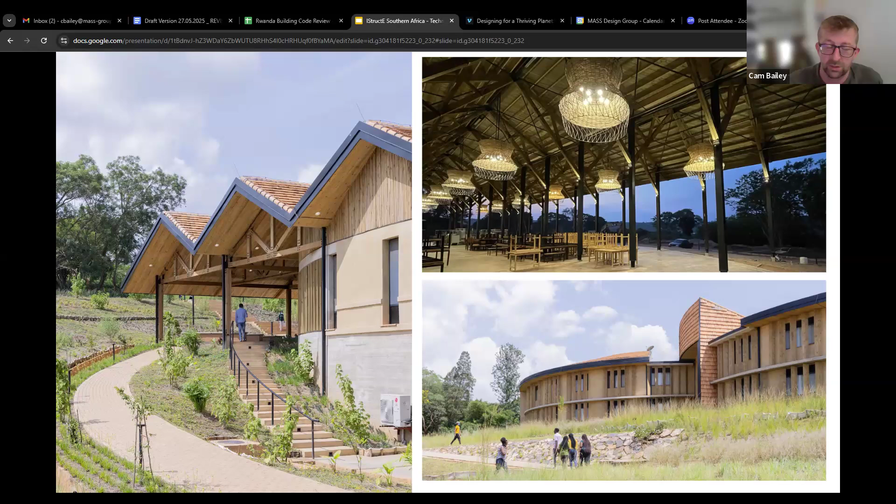Across all buildings, the foundations are constructed from local stone. The walls are constructed from earth sourced from the site, and the roofs are built using regionally sourced timber trusses for the most part, but also beams, rafters, purlins, etc. The project's won a number of awards since it was completed a few years ago, including an IStructE award in 2024 that was given for holistic regenerative design.

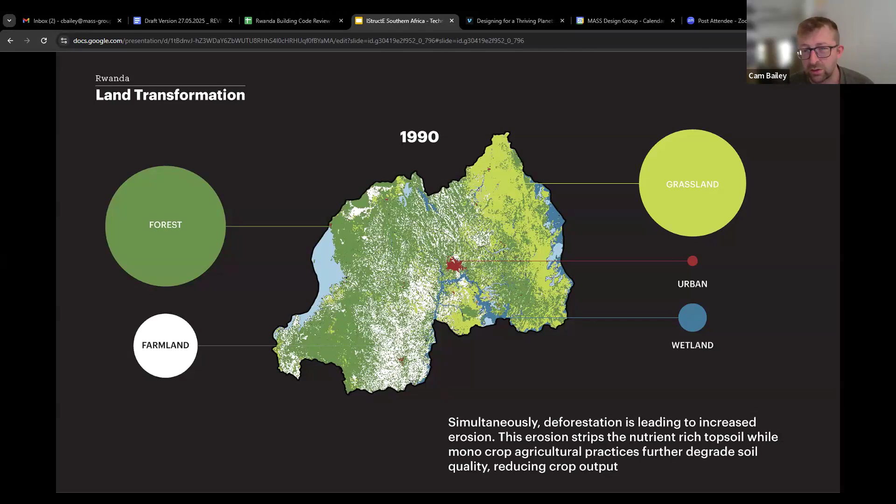So a bit of background on why this project. The majority of Rwandans still depend on subsistence agriculture across the country. And the country is the most densely populated country in Africa and one of the most dense rural landscapes in the world. In the 1990s, the country had a healthy proportion of natural forest and grassland. However, over just 3 decades, you can see how much of this has changed, with much of the forest and grasslands remaining being enclosed in national parks.

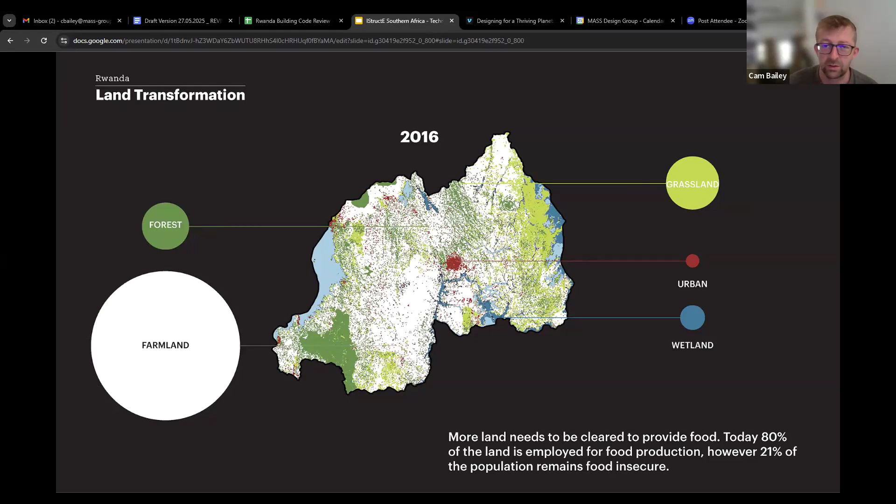Even with around 80% of the land now operating as farmland, around 20% of the population remain food insecure, and this is a growing issue as the population continues to increase. RICA's investment in innovation with sustainable agriculture is considered crucial to the country's health and wealth outcomes. So the mission of the RICA campus was to train the next generation of leaders in conservation agriculture to attain healthy and sustainable food independence in Rwanda. So here we asked, how do you best balance conservation practices, agriculture practices, community well-being, along with local material sourcing and carbon positivity at scale?

So we mobilized this through what we call a One Health approach. So our landscape team first observed the campus to identify key ecosystems that were important to preserve. A vast portion of the 1,500 hectares contains one of the last remnants of savanna forest in Rwanda, outside of the Akagera National Park. While the papyrus wetland along the lake shore at the bottom of the hill is a hotspot for biodiversity and also an important material source for local craftspeople. We protected these areas of the site and located all buildings on the campus in the space between.

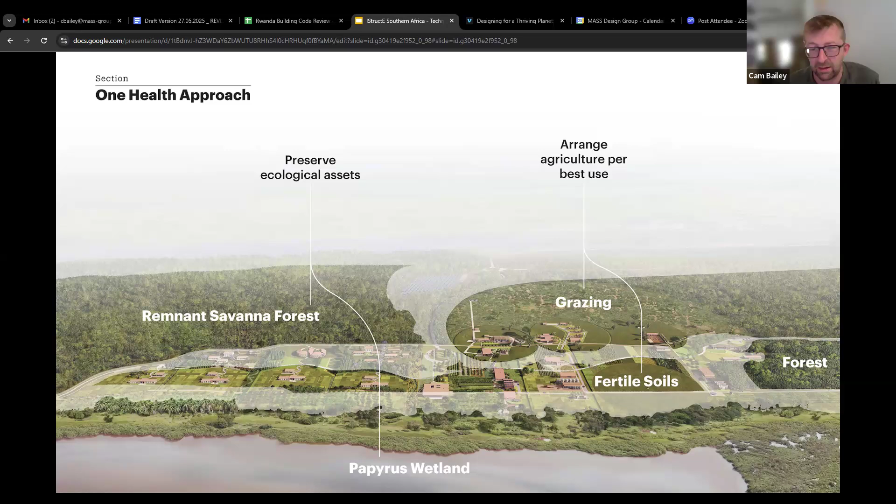We also located buildings based on soil quality and growing conditions, with more arable land at the bottom of the site being used for crop-based curriculum, such as row and forage and veg and tree, and the first year farms, where first year students really learn the processes of agriculture, hands-on agriculture. While the upper portion of the site was used for animal grazing, supported by enterprises such as the dairy and the poultry and swine. I think I just skipped over a slide, so I'll just jump back one.

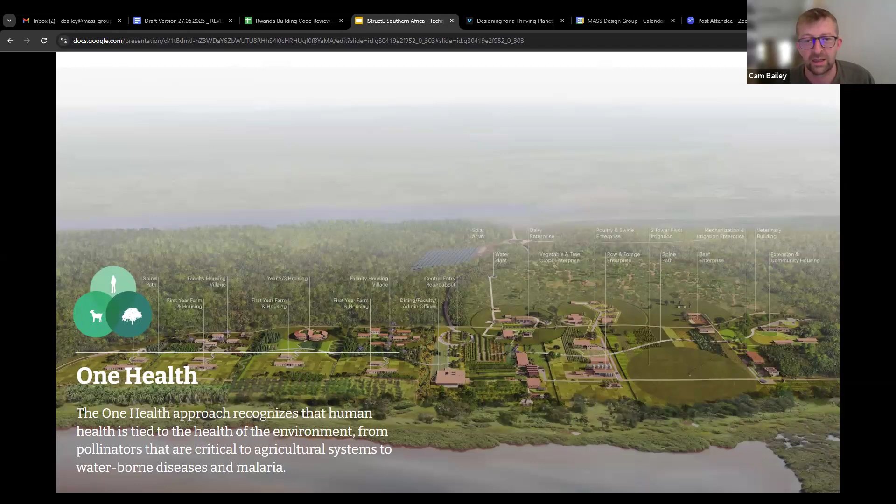This idea of One Health is the idea that a human settlement can be productive and beneficial for the environment in which it is built, and the idea that the well-being of humans, animals, and ecosystems are all very much intertwined. So in terms of the infrastructure for the campus, we're in quite a remote location here, quite far from the closest village. So we mobilized the lakeshore location to achieve circular water systems and installed a large solar farm at the top of the site to provide power to the entire campus. This made RICA 100% off-grid with renewable power and water systems in place.

So as we get into structural design, the key issue is obviously resilience. Given Rwanda's proximity to the East African Rift System, it is one of the more seismic regions on the continent, particularly in the west of the country. Earth construction is renownedly low in strength, it's quite brittle and heavyweight, and so not ideal for seismic scenarios. But we thought we would give it a go anyway, particularly as we were based more in the southeast of the country, where we do have slightly lower seismic hazards, and we designed the buildings for a peak ground acceleration of 1.6 meters per second squared, or 0.16 G.

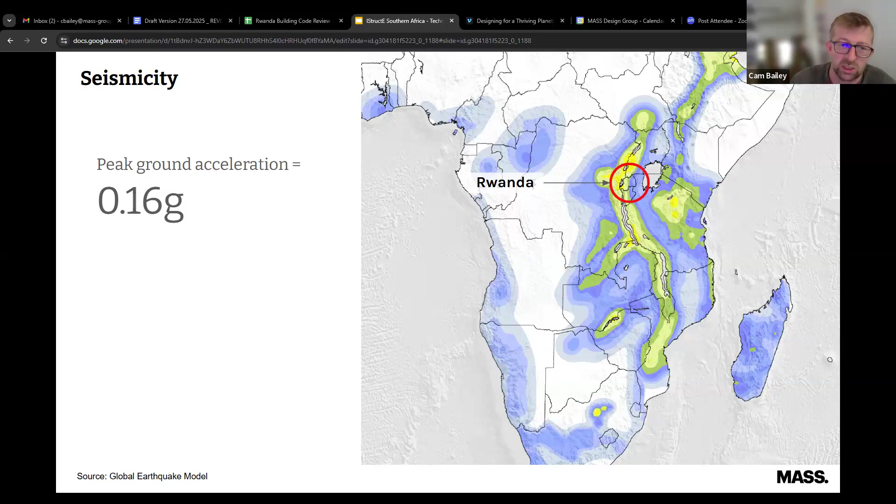And in terms of the design that we followed, Rwanda building code is in place, and it does require seismic design, but there aren't any Rwandan standards currently in place to follow for seismic design. So we leaned very heavily on the Eurocodes, and then partnered this with the New Zealand standards, which cover earth construction quite well. And so I'll hand over to Aimable at this point to talk about the walls and the earth.

Thank you, Cam. We'll move into the earth section and go through our process into using earth as a building material for the entirety of all the walls on this project. So to start, you would ask yourself, why earth? So we do know that in general, the building industry does contribute to a large portion of the global emissions, and 11% is from the construction industry itself. And that means materials and how these materials are manufactured or produced and where they are sourced. And we thought that earth could be a good alternative material compared to conventional materials, which is not typically used on a project of this scale, especially in Rwanda.

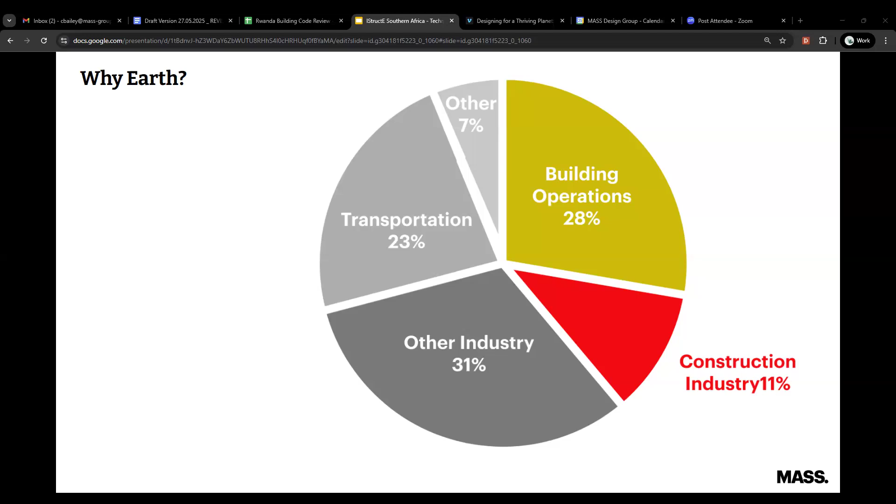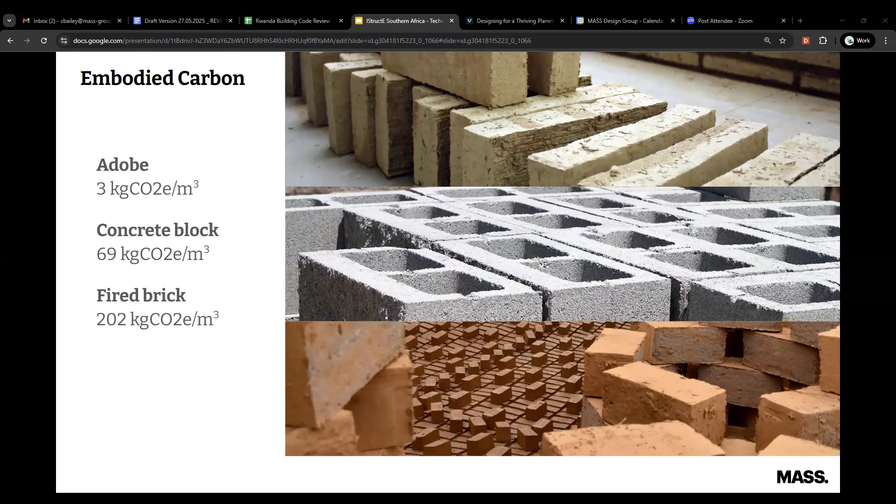And to start, we looked into materials that are typically used in Rwanda. So looking into concrete and fired bricks. And for instance, we know that fired bricks require higher energy during combustion and can often lead to deforestation if it is not done sustainably. And we also know that CMUs require some amount of cement. And these are the materials that we wanted to divert from at the start. And contextually as well, earth made a lot of sense to be used because the skills already exist, the material is available and plentiful in Rwanda, and there is no need for any infrastructure for this material.

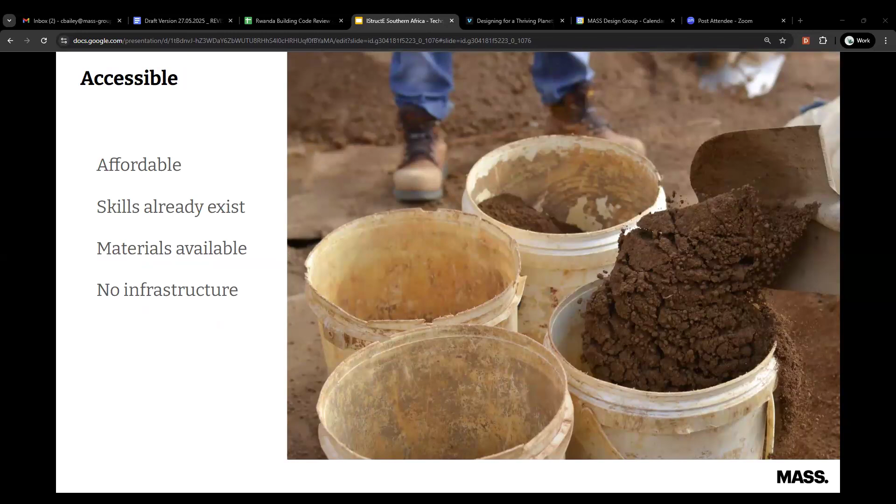But historically in Rwanda, a huge proportion of Rwandan homes are built using earth, and it is often associated with low-income housing and poor quality homes, and can sometimes be dangerous based on how these are built. And we also know that it does reduce the reliance on high energy materials like cement, and it does help regulate the indoor temperatures naturally and can overall reduce the environmental impact of the buildings. And just beyond the performance, it does also connect to the local building traditions and the skills that are available locally, making it both practical and scalable.

But due to the poor workmanship and poor quality of earthen homes in Rwanda, it was banned until 2022. Banned, by that I mean restricted by the building code. And our first question was whether we can design earth buildings that are sustainable, durable, breathable, but most importantly, resilient to moderate seismicity. And this was an opportunity to see if we can change the local perspective. And to embark on that journey, we started with a feasibility study, first to understand whether the use of this material on this project is possible.

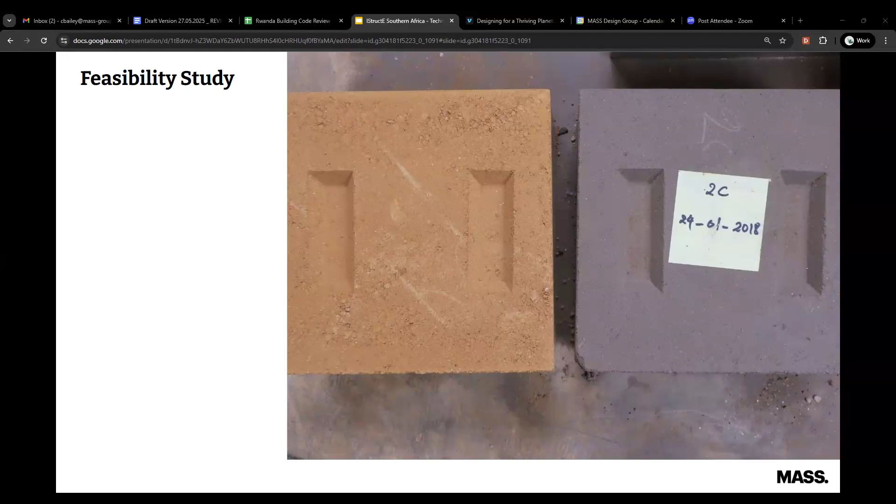And we went into literature to understand what has been done historically, to understand what is the base soil that will give us better results. And on this site particularly, we had the luxury of having different areas that we could source soil from. And we had 4 locations with varying types of soil, ranging from sandy to clay soils, which we therefore collected, and we designed different mixes.

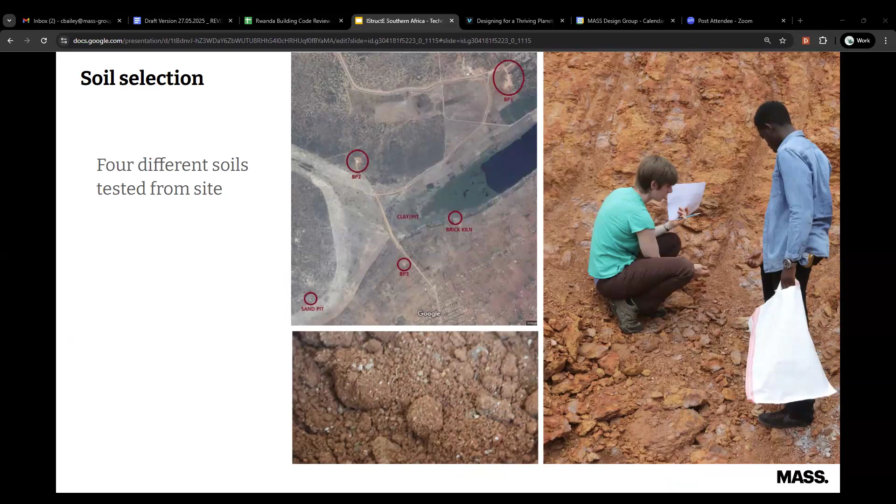For the mixes, we tested samples using stabilization of either cement or lime, and samples with no stabilization at all. And we tested about 5% to 7%. In the end, we realized that with 5%, we could get almost all the properties that we wanted, but we were not achieving the protection that is required, especially during construction. So we upped the stabilization using cement up to 7%. But even with 7% cement stabilization CSCBs, we still had a 73% reduction compared to a fired brick.

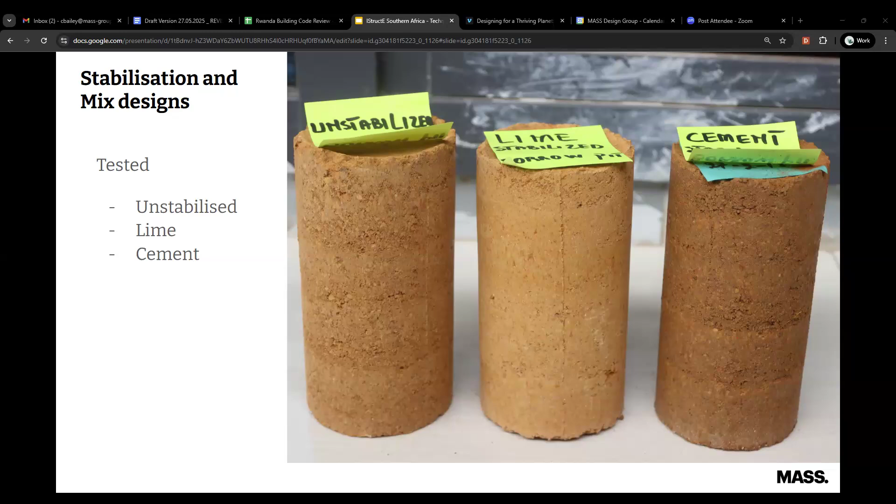And whilst producing these CSCBs, from literature review, we developed quite a number of low-tech tests that could be done by the personnel producing the bricks to understand things like optimal moisture content and the plasticity of the soil to be placed, so that we get better results and better bricks in general.

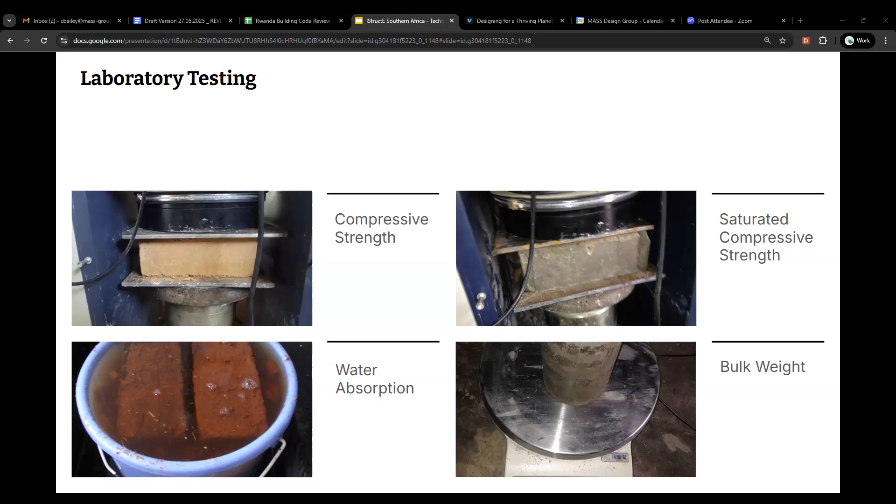And we moved to laboratory testing, and this was a test that we could benchmark with the performance requirements from the Eurocodes or other standards that we used. That included things like compressive strength and water absorption, to give us design data for our design. And these are also the targets or the requirements that we had established from the codes. For instance, we were looking for the compressive strength to be 5 MPa, or the water absorption to be between 10 to 15%, which is also in line with other masonry construction materials.

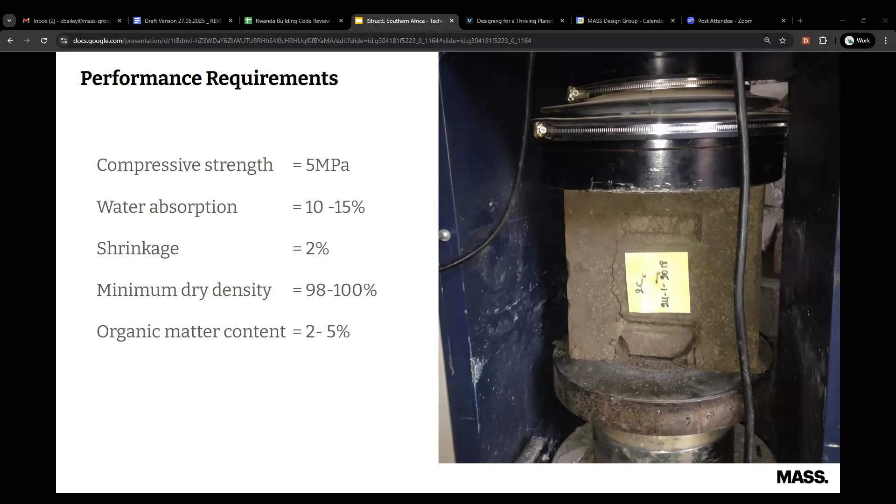And we had challenges. We did develop testing, but we could only get so far with the facilities available in Rwanda. One of the challenges was in regards to the Young's modulus, for which we had to make assumptions, because whereas for other materials it could change, for earth there was no adjustment based on soil type, stabilization used, or density of earth. And given that earth is highly variable, we didn't find any structural guidance that we could use to adjust these properties. And this was a problem that could lead to a bit of conservative design.

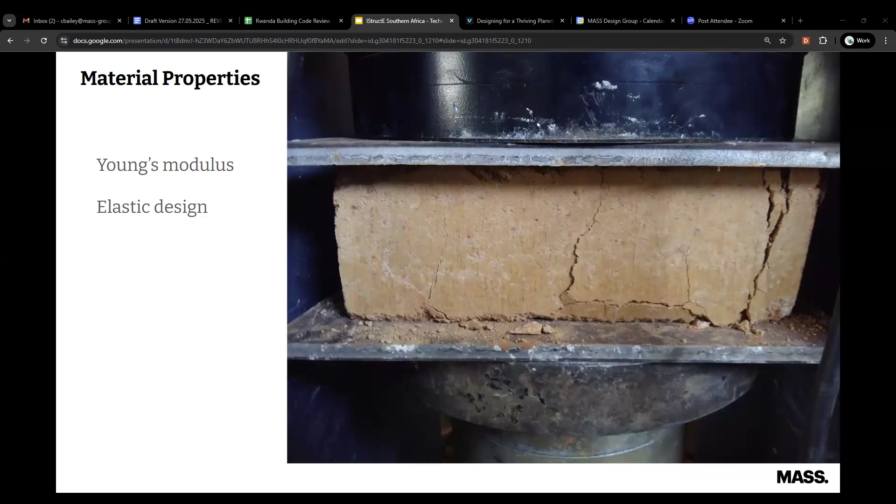And now moving into the design and detailing, one of the key areas that we understood is to design buildings for durability. And this meant providing a concrete plinth, which was about 150 mm raised from the floor finish level, and providing generous roof overhangs and window sills as well, just to make sure that the water is not affecting the walls.

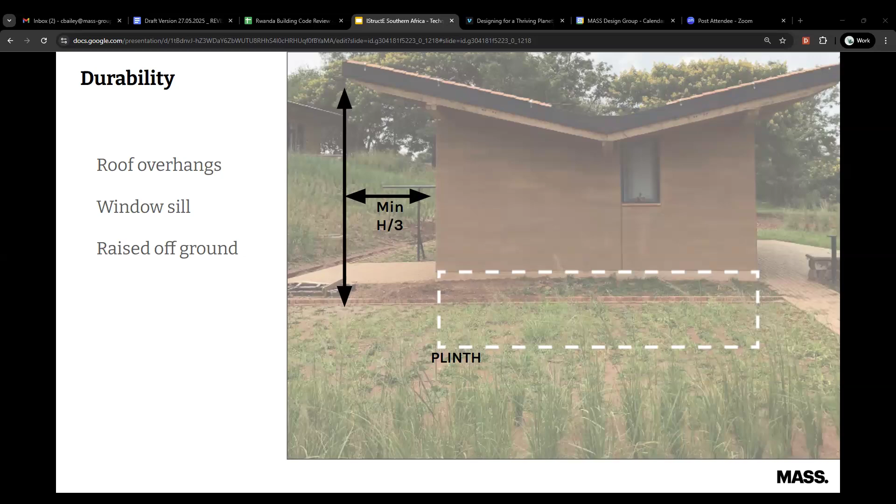And in general, we had two typologies of buildings: residential buildings and enterprise buildings. I will go into more details, but our intent was to use unreinforced earth for residential buildings. The aspiration was to make these residential buildings as sustainable as possible, but still designing them for moderate seismicity and durability. Residential buildings were inherently less vulnerable to the seismic hazard than larger enterprise buildings because they are single story and had higher wall density. So we thought this could be unreinforced.

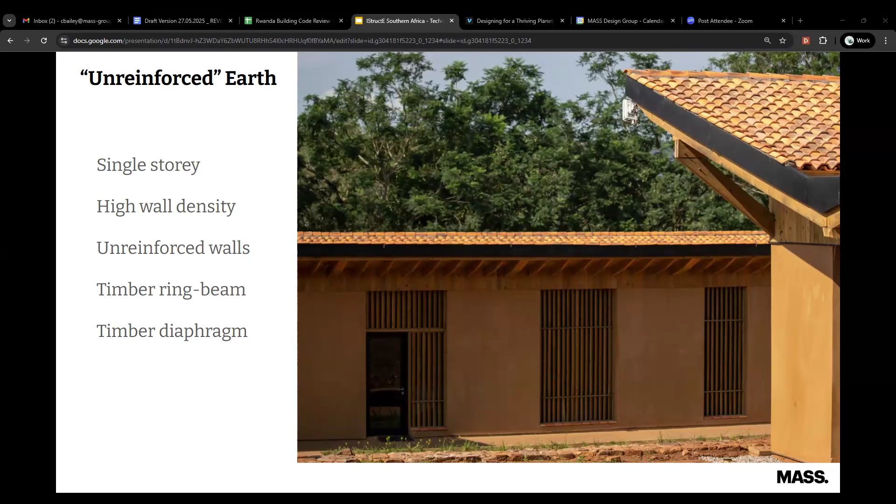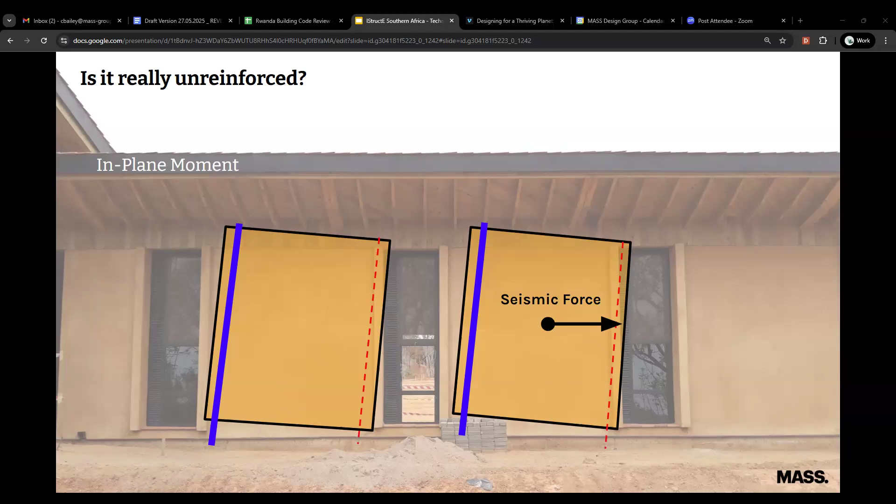In terms of the overall structure, we used stone masonry as a foundation, CSEB walling, a timber ring beam, and a timber diaphragm. But even though our intent was to make these unreinforced, in practice we still had to provide tie-down rebars to combat overturning at both ends of the panels, and shear, either at the base to connect the walls to the grade beams, or at the top where these walls meet the timber ring beams. On average, even though these walls were said to be unreinforced, they ended up using about a quarter of the steel reinforcement of reinforced walls.

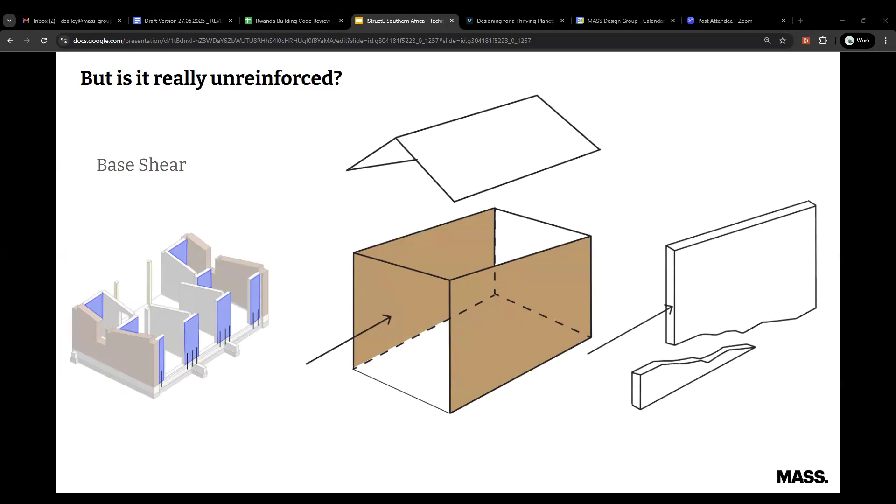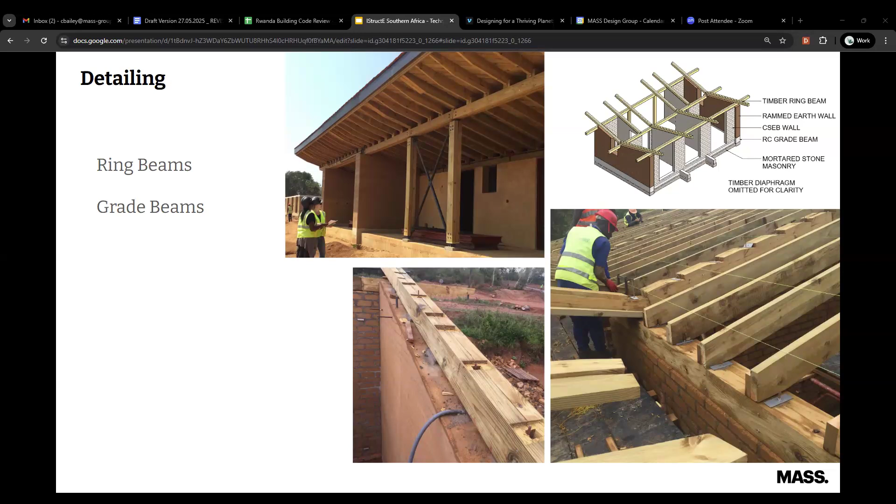One thing that we've learned: lots of the engineering guidance that we reviewed recommended using timber ring beams. In reality, this involved a lot of complex connections, and it was quite difficult to resolve on site. You can see from these images the different systems that had to be coordinated, especially where we have reinforcement and how the timber rafters were connected to the ring beams.

And the next typology of buildings was enterprise buildings, which were typically 2 stories and more vulnerable compared to the residential buildings. They had taller walls, larger spans, and less wall density because of the open spaces. It was clear from the start that these had to be reinforced walls. In contrast to the residential buildings, we used concrete ring beams, and we also used steel cross bracing as a diaphragm just at the underside of the timber trusses.

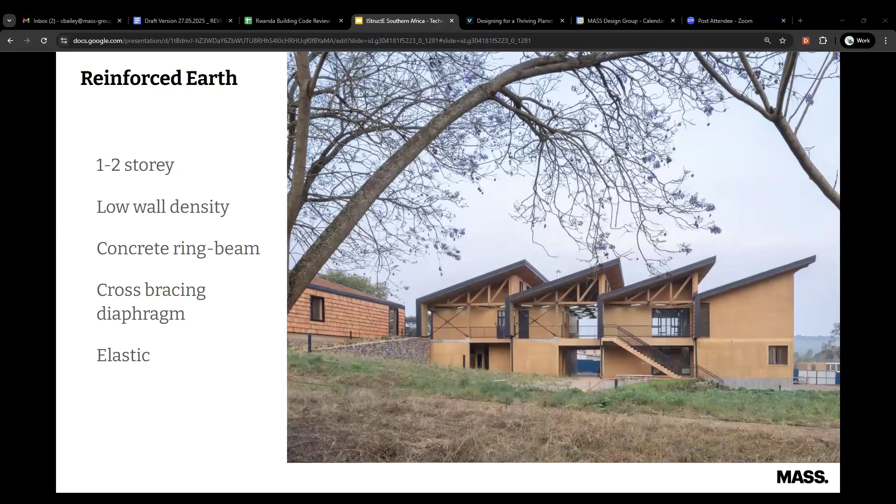But from all of this, we had learnings as in key areas to keep in mind while designing this building, especially for reinforced. Things like coordination, which was quite key on how the reinforcement would run into the whole hollow parts of the blocks from the grade beam to the ring beams, and where this lap would happen.

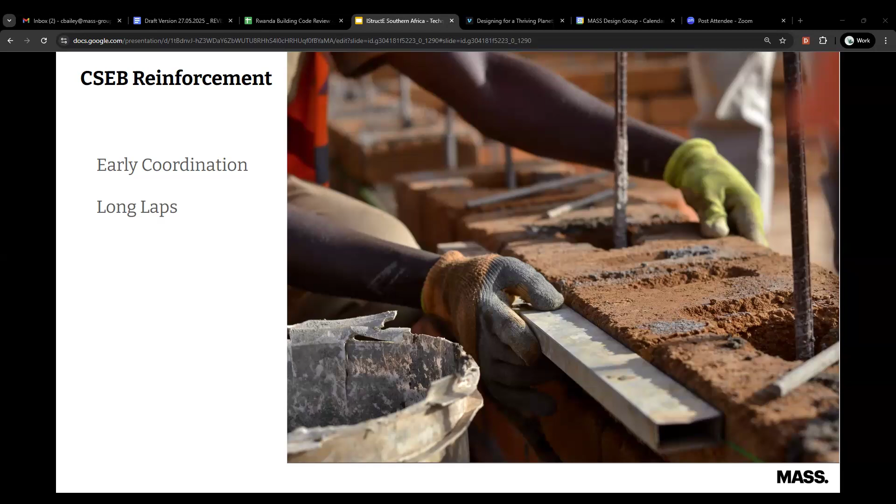And to get back to the question that we had when we started this, whether we would be able to design safe and sustainable buildings for moderate seismicity, we could say it's possible, but of course with a few reflections. One is preparation and quality control is quite essential, especially because of the variability of earth as a construction material.

On site, we produced 2.5 million CSEB blocks, and in storage they are prone to rain that would degrade their capacity or their quality. So preparation was quite essential to the success of this project, and as well the detail of durability by protecting especially from water.

And we also felt a bit constrained by the lack of data. So in different areas, we had to combine codes, but most importantly, there was a lack of data that recognizes the variability of the material, which leads to a conservative design. And even though the stabilization of the CSEB can significantly impact the material properties, the team did find that the available guidance would often give a single value of a material property, and that it would not necessarily indicate whether this applies to a stabilized or unstabilized earth.

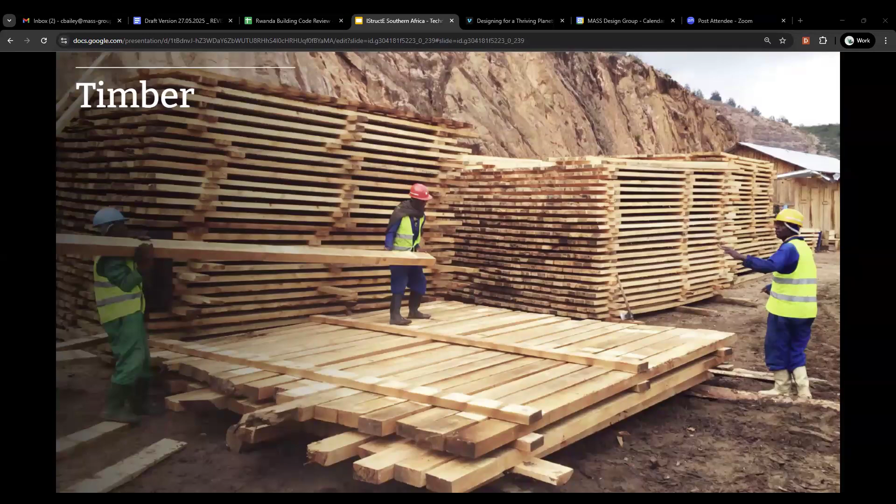Cam, you are on mute if you are saying anything. Sorry about that. I'll just dive straight in.

Yeah, so as mentioned, we decided to mobilize timber as another primary structural material in combination with the earthen walls of the buildings, as another natural bio-based material in order to reduce the embodied carbon of the structures. And actually, when the project was first being ideated, it aligned very closely with the opening of Rwanda's first FSC certified forest called New Forests in the south of the country, close to Nyungwe. So we thought it would be a great opportunity, with the number of buildings included, to use this as a demonstration project for regionally sourced timber.

Typically the issue with sourcing local timber is that the timber is generally sourced in an informal way, and it's more often sold for charcoal or temporary scaffolding than for permanent timber structures. And so, as I say, the project was inspired by this new mill opening up. They'd purchased kilns and milling equipment just around the time the project was starting up.

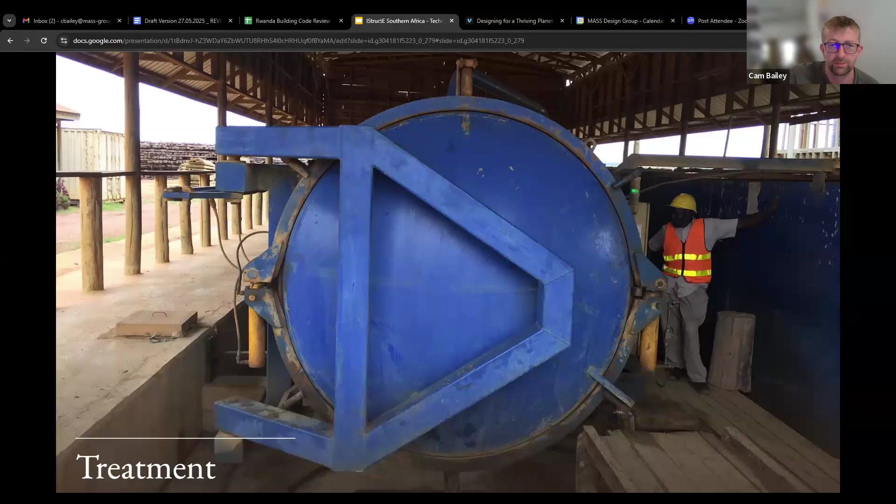And finally, another issue is grading of the material. With the mills in East Africa being relatively new, there's no timber grading capacity that really exists, and there's no regional timber grading standard. So upfront, for the purposes of design, we assumed a kind of S7 equivalent grade according to SANS, which is similar in ways to the C16 grade that we see in Europe.

This was considered quite conservative, based on the research that we've done for the species, in particular Pinus patula. The density of this pine is quite high, and so we'd aligned it based on advice from experts and our own research on this S7 grade. And we also made the assumption that the timber we could get once we were up and running would meet visual grading requirements to demonstrate that we could achieve this S7 grade.

There's two methods of grading that we can use. There's visual grading and mechanical grading. We're very aware that mechanical grading wasn't an option because of the mills being very new. And so we thought we'd lean very heavily on the visual grading. So they were our upfront research and assumptions and challenges.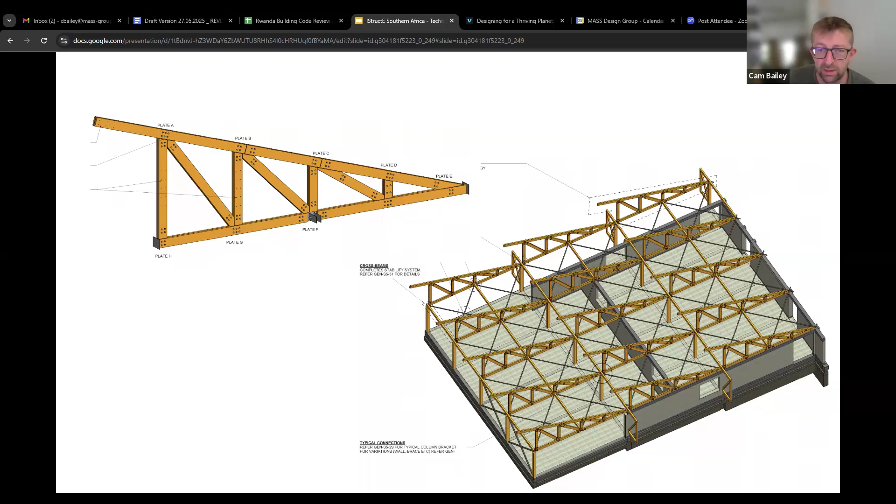And the original intention was to source all 3,000 cubic meters of the timber required for the project from New Forests in Rwanda, only 200 kilometers from the site. However, once the project started construction, New Forests had some issues meeting the demand, and the first phase of the project was really time critical, with first-year students waiting to arrive in July 2019.

New Forests ended up being able to deliver around 25% of the timber required at the level of specification that we needed to reach this S7 equivalent grade and within the time that we needed it. And so we were left looking for other sources. Because the supply chain is limited within the region, we were looking quite far afield to other major timber suppliers just in order to meet the demands that we needed.

But obviously, this would be offsetting some of the carbon savings that we're making through using timber and almost made that decision obsolete just through the carbon produced through transportation of large volumes of material. But yeah, we looked at Canada, Northern Europe, Turkey, India, and Sri Lanka, and of course South Africa being our closest option.

However, through some in-depth research and some visits, we were able to find enough mills to source the timber from in Rwanda, Uganda, and Tanzania. So we went from a 200-kilometer delivery distance to a maximum of 1,400 kilometers. I think the furthest was in Tanzania.

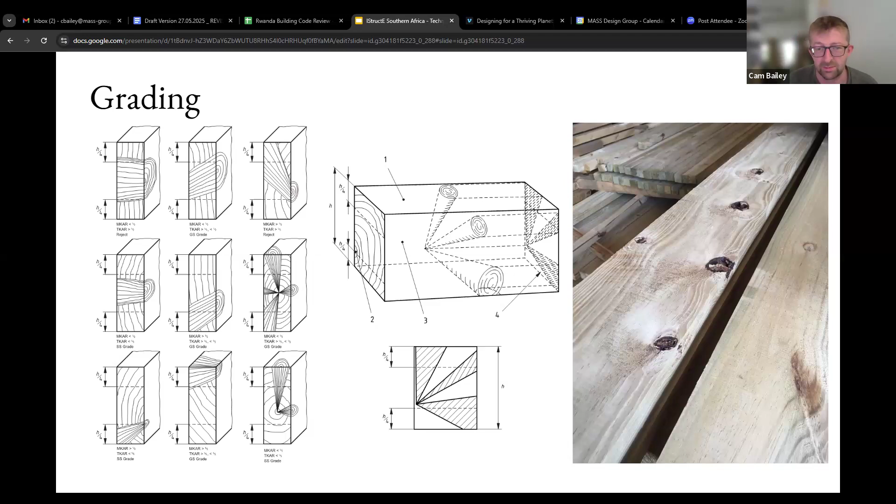And it was very hard to reject timber as well because it had already been treated with CCA and there wasn't much use for it otherwise. And so we really wanted to use as much of the timber as possible. So we developed nice, clean testing plans in accordance with the Eurocodes, with the hope of one of the mills, or the contractor even, purchasing some testing equipment to do this work in a nice monitored way, closely aligned with the method stated.

However, no one was really up for doing that, and so we ended up adapting a concrete cube crushing machine using just welded steel bars to create the 4-point bending test. That is the main way of testing strength according to the Eurocodes. It's important to note, whilst there are a number of tests that we could do, in the essence of time, given that construction was happening at this point, we decided to limit to bending tests where we could also get the modulus of elasticity as well as the bending strength, and also measure the density. And within that, there are methods within Eurocodes to convert that to an equivalent C grade to determine your compressive strength parallel to the grain, tension strength parallel to the grain, etc.

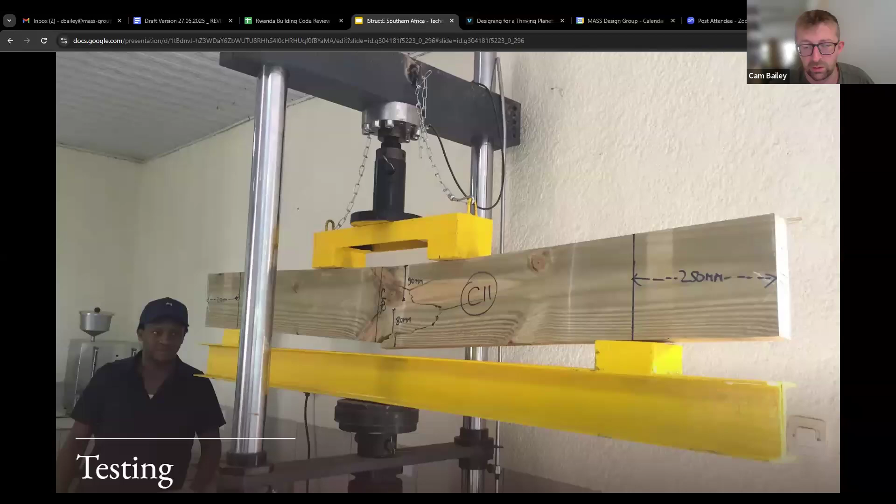We tested around 40 full-size specimens per batch of timber that was received on site. I think we ended up with around 15 batches with roughly 40 samples being tested from the various mills. So you can imagine it was a huge log of data to keep track of. And of course, with timber design, given it's a natural material that grows in variable ways, we can't just use the mean or the average value. We have to use the 5th percentile value or the characteristic properties of the timber to ensure that 95% of the timber being used across the project is above the strength value used in design. And so we crunched a lot of numbers. We removed outliers from the data sets, and we carried out a lot of statistical analysis on these sample batches to determine the values we could use in design.

So in terms of density, and just to explain here, the pink box and whisker diagrams you can see on the slide here are what we call grade one. So timbers that didn't meet the S7 visual grading, but met our slightly higher, less knots, less defects type grade. And this was meant to be our best timber. The blue represents what we call grade two, which was slightly more knots allowed, intended for less critical elements in the structure. And then finally, the yellow being timbers that didn't meet any of the grades, but we thought we'd test them anyway to see if we could use them.

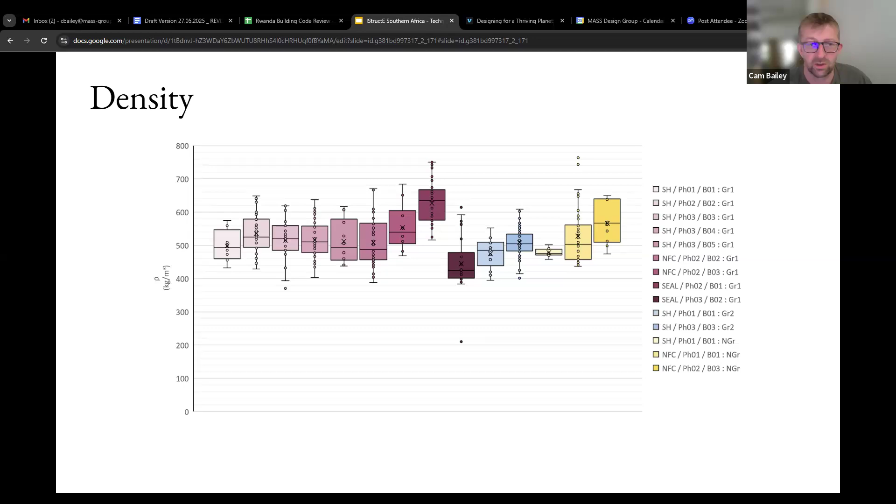And so, as you can see here, the density actually came out pretty consistent across all batches and all grades. Roughly around 500 to 550 kilograms per meter cubed, which is high for a softwood, and again backs up why we thought the timber might be a bit stronger than it was. But as you'll see, if I go to bending strength first, the bending strength was again relatively consistent across grade one and grade two, but less so for the ungraded timbers. But when we worked out our characteristic values, because of the large spread we saw in the results, we ended up getting basically 10 to 12 MPa characteristic bending strength that we were allowed to use. Then in terms of the modulus of elasticity, we saw quite a lot of variance in the batches.

And the stiffness properties are significantly lower than we would have hoped or would have expected with similarly dense timbers grown elsewhere. And so we were getting a mean modulus of elasticity of not much more than 4,000 MPa, if that, and characteristic values of around 2,500 or 3,000, which is around half of what you might expect from a C16 grade or S7. We think this is due to the speed at which the timber grows, but some more research is needed there.

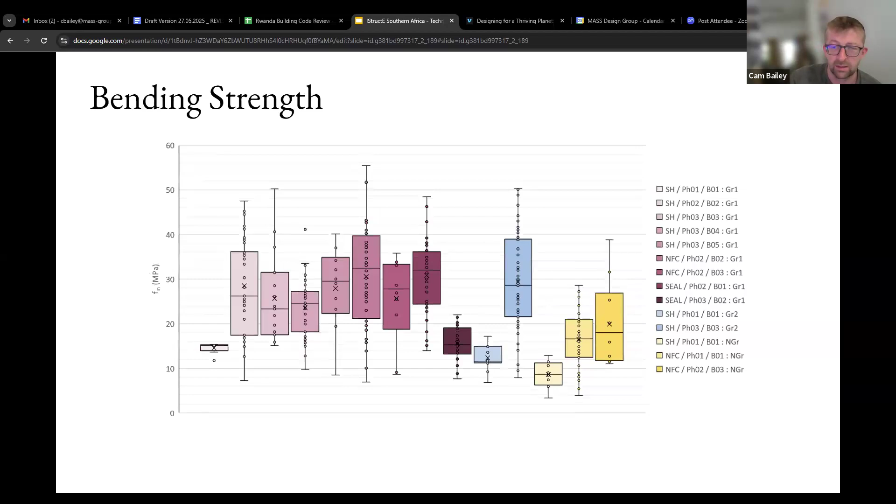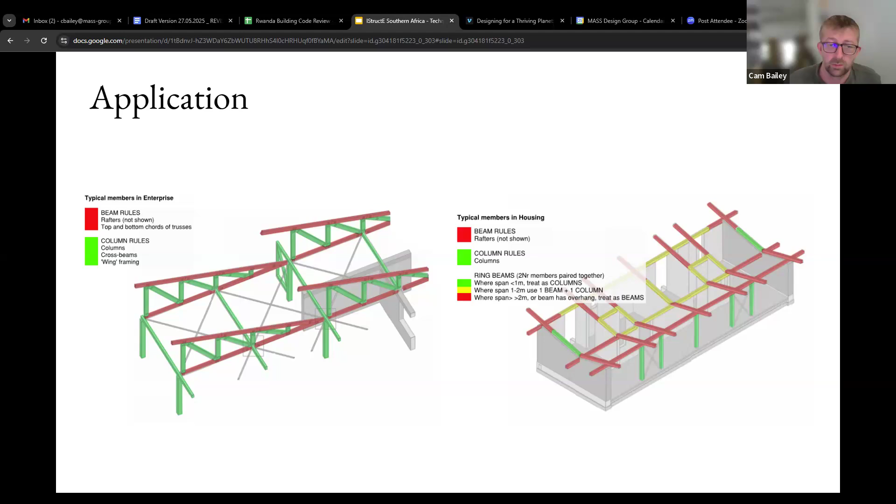And so what that meant is, whilst the buildings were being built, we had to decide where these different grades of timber could be used and applied across the structures. So as I mentioned, less critical elements mobilized the weaker timbers, and for top and bottom chords of trusses, we specified the higher grade of timbers. And so there was a huge amount of organization that had to happen on site from our supervision team working with the contractor to ensure these things get done properly.

However, after all of the effort and the hardships in the process, just to touch on some of the outcomes, we were able to source around 96% of materials by weight within Rwanda. Obviously, a lot of the weight comes from the earthen walls. This all came from the site, but I think this number even includes the furniture that goes into the buildings, etc., which was also designed through our furniture team, utilizing locally sourced timber and papyrus, etc.

We worked with a large labor force of 2,000 plus people, or even more perhaps, 98% of which came from within 100 miles of the site. And a large proportion of these workers were trained in formalized earth and timber construction. And actually, there's stories of break-off groups from the contractor going on and setting up specialist contracting firms in earth construction, and they've gone on to build lodges and other things in the country using these materials.

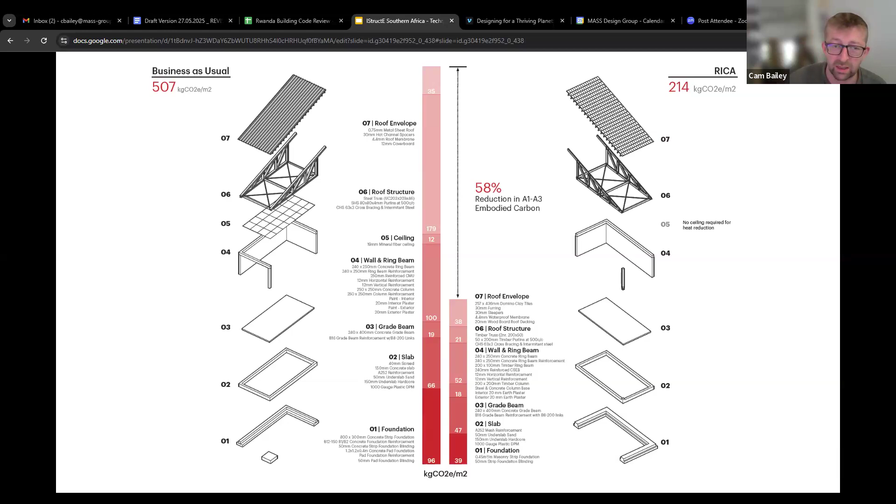Compared to business as usual, where you might expect to use metal roof sheeting, steel trusses, installing a suspended ceiling, perhaps using concrete block walls and concrete foundations, we were able to demonstrate a nearly 60% reduction in upfront embodied carbon. The stages A1 to A3 are known as cradle to gate, to get the materials on site. By stripping back and using these natural, locally sourced materials, we're around 2/5 of the global average for educational buildings. Whilst these materials aren't particularly innovative and both have been used for hundreds, if not thousands of years for construction, formalizing it in a way where we can achieve these modern buildings that are resilient to earthquakes was an important step in this project.

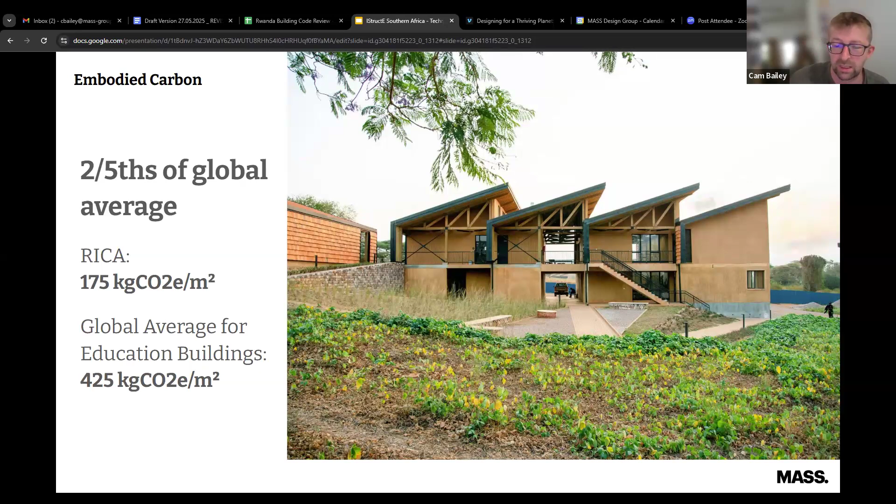We also calculated our carbon metrics for the campus as a whole, including upfront embodied carbon, operational carbon, leaning on the 100% off-grid energy and water systems, plus a lot of the biodiversity restoration that our landscape team designed along those natural ecosystems and within the campus itself, which sequester carbon well within the campus. And through all of this, we've been able to demonstrate that RICA is likely to become the first carbon positive university campus in the world by around 2035.

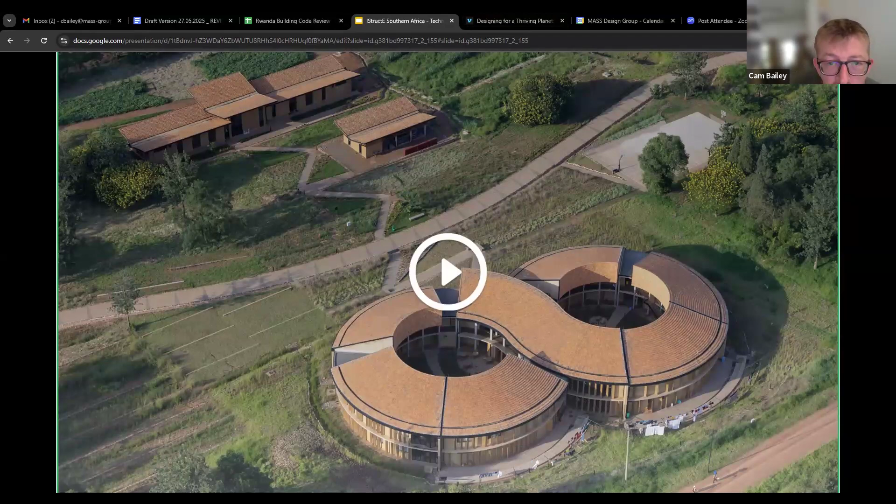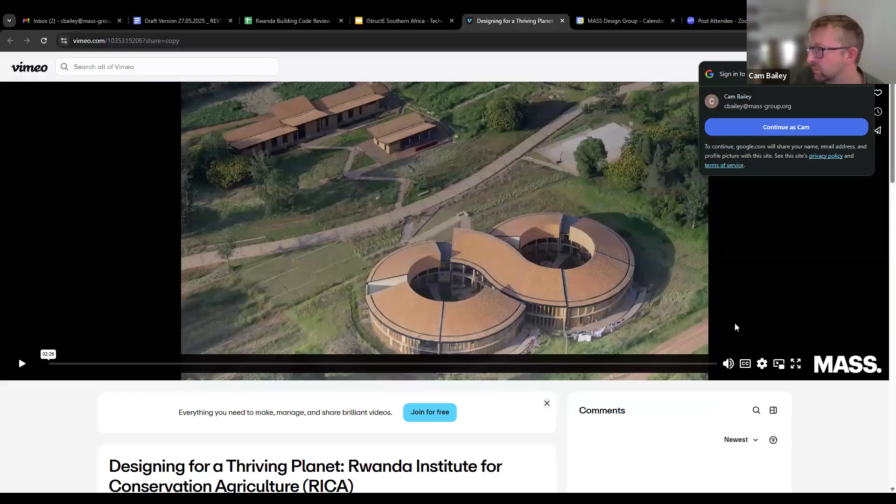Now, if we've got time, I do have a short video that our media team has put together. Hopefully you can all see the screen here. Let me just stop sharing and make sure that I have. Hopefully this comes through.

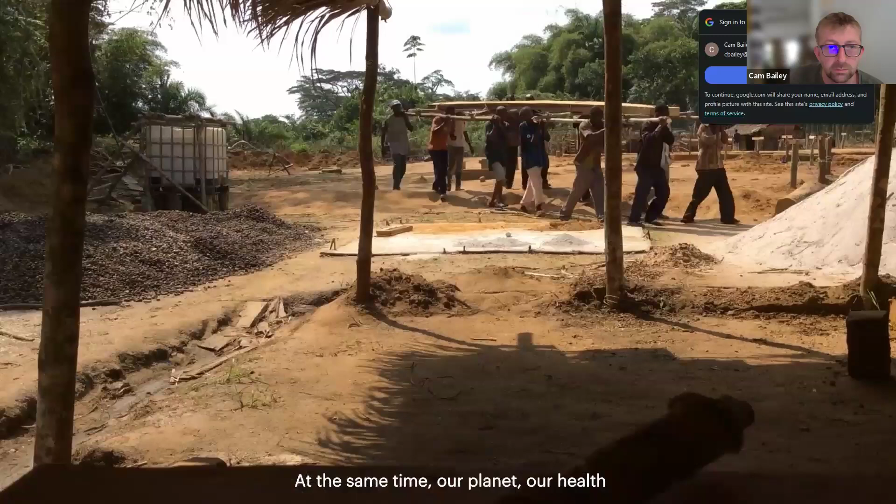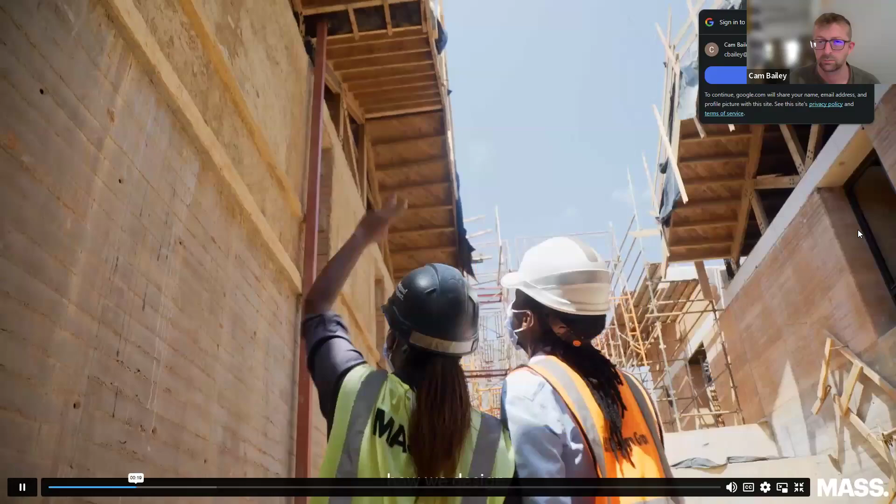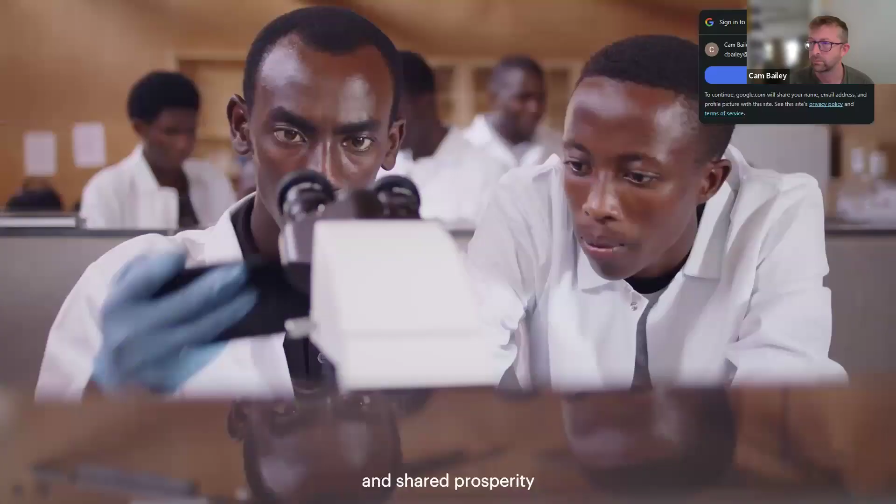Architecture has made great strides. At the same time, our planet, our health, and the ecologies we depend on continue to suffer. Regeneration is required, and it requires us to rethink how we design. It requires us as architects, engineers, and landscape designers to work together beyond buildings. On the shores of these Nile-bound lakes, Kilimbi and Gaharwa, the Rwanda Institute for Conservation Agriculture, RICA, is solving part of our shared global problem, providing healthy food and shared prosperity on less land for more people and an increasingly fragile environment. A One Health education is preparing the next generation of conservation agriculture entrepreneurs to overcome these challenges.

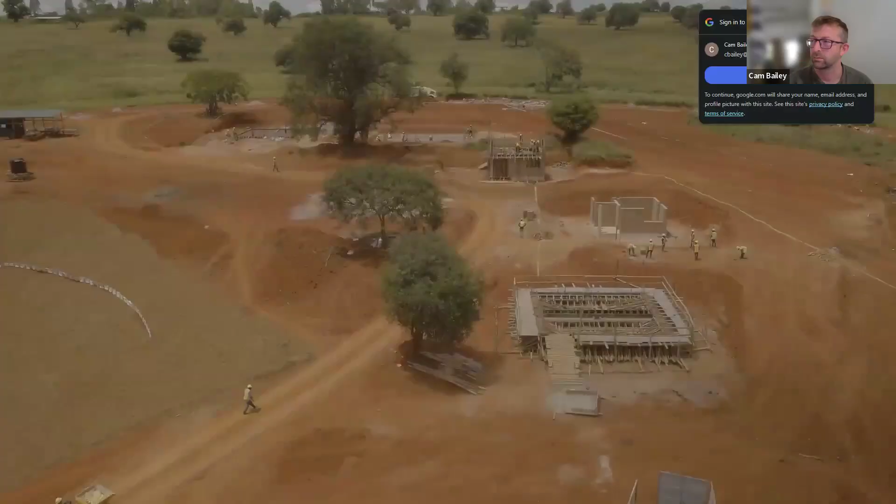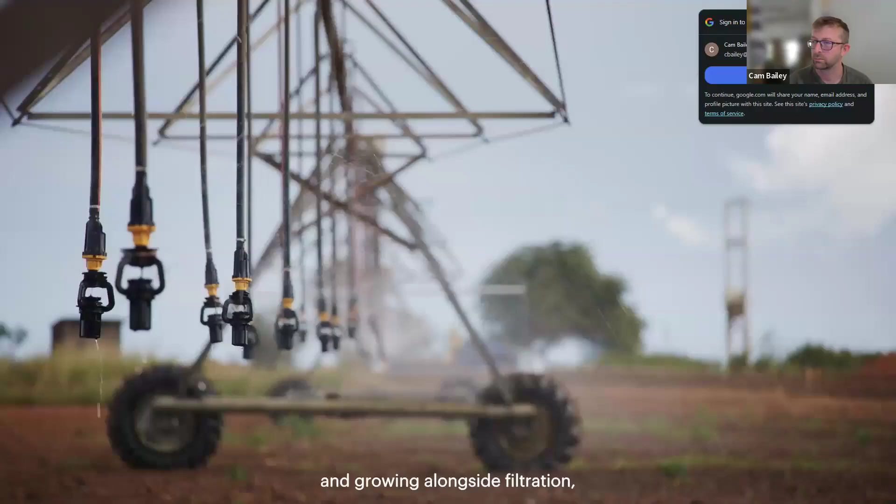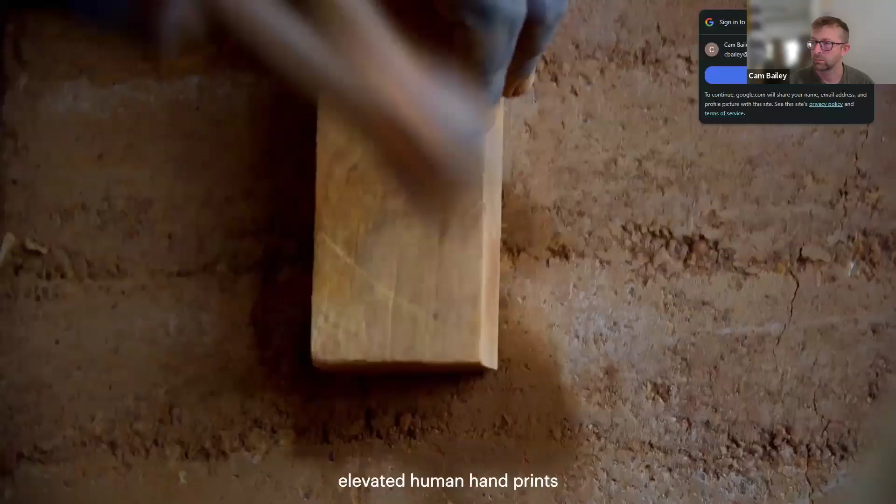The landscape began to form a map to expand one of Rwanda's last savanna woodlands with macadamia and these acacias that these gray-crowned cranes rely on to prosper and prevent disease. Building sites began to create harmony between agriculture and conservation. Soil health, grazing and growing alongside filtration, planting and pollinating. This place provided a map for how to build. Rammed earth and earthen blocks elevated human handprints while lowering carbon footprints, as did timber, harvested and reforested. This campus was not only born of blocks and beams, it was born of care, quality, and commitment. Only through a collective, accompanying community, could we discover a new way to build and greater hope for us, the animals, and the environment we all depend on.